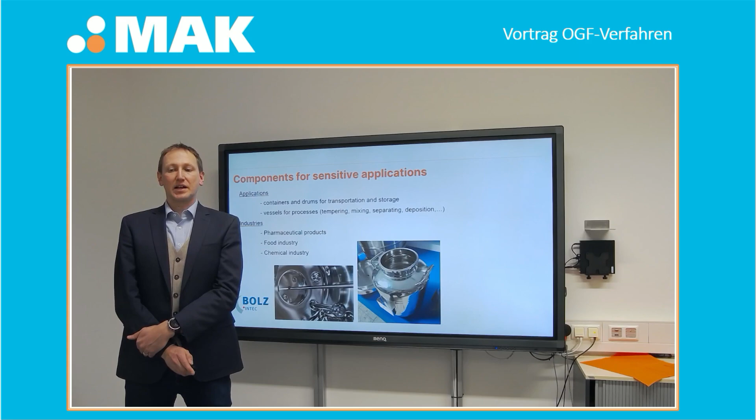The manufacturing of these components is normally carried out using high grades of stainless steel, for example V4A grades like 316L, but for some applications only lower grades like 304 are used. The standard regulations are given by different ISO standards. There are some regulations regarding surface quality and the look of these products, and to reach these high requirements, especially the hygienic requirements, there must be no surface defects. The surface roughness you have to reach is less than 0.8 micrometers, and the surface must be easy to clean and homogeneous. But unfortunately, there are no more specific requirements given by ISO standards, which is why there are mostly some additional customer requirements.

Well, talking about influencing factors: factors that influence the quality of the surface also influence the quality of the good inside our vessels. First, depending on the production process, the surface roughness, the surface topography, and of course the uniformity of the surface can be influenced. The chemical composition of the surface can be influenced as well, maybe by special chemical treatments to increase the stability of the passive layer. On the other hand, we have influencing factors from the product inside our vessel, for example the molecular structure or process parameters like temperature, humidity, flow velocity, and so on. All these factors together influence the interaction between our good and our stainless steel surface.

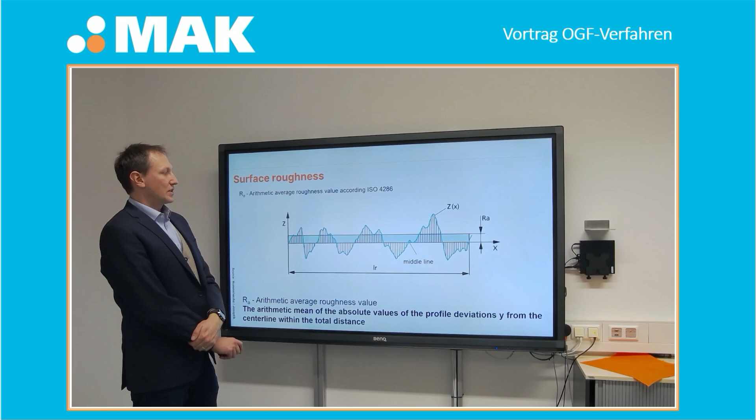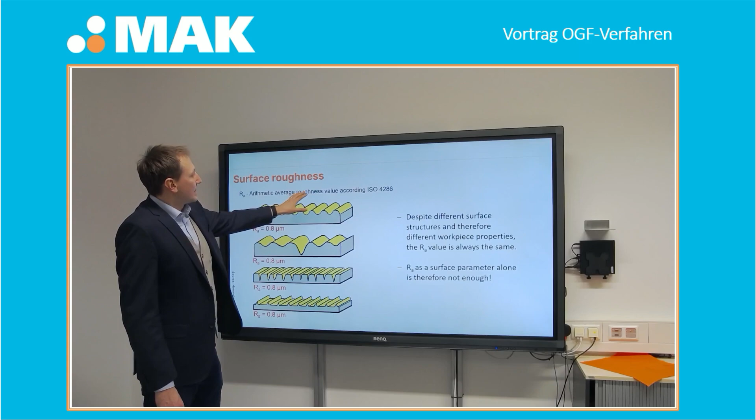And if we're talking about surface, we also have to talk about surface roughness. It's well known that we have different standards to characterize surface roughness, for example the ISO standard 4286 to characterize surface roughness by the Ra value. And it's also known by many people that a surface roughness like Ra 0.8 micrometers can lead to very different surface topographies. As shown here, you can have a very nice homogeneous structure, but you can also have a structure like this or like this. So even if we have a standard surface roughness smaller than 0.8 micrometers, we must be aware that you can have completely different surface conditions.

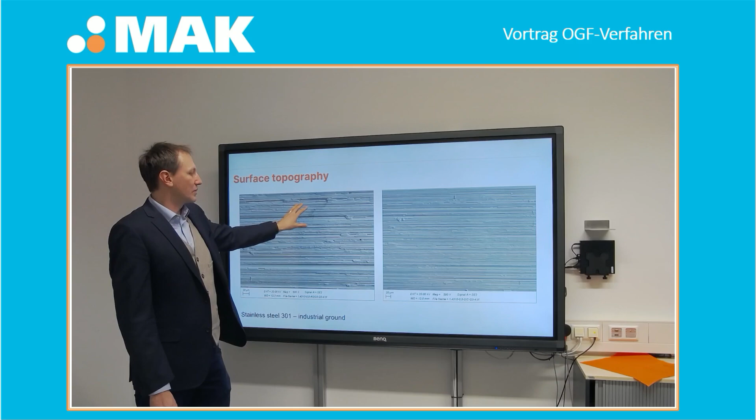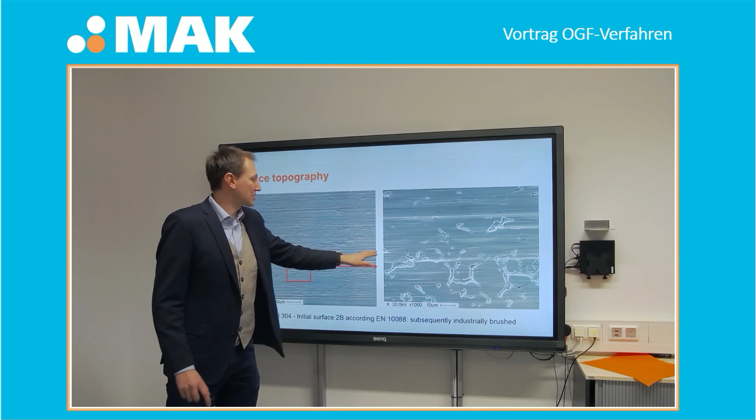If we take a closer look at a surface, maybe a ground surface, like shown here, an industrially ground 301 stainless steel, you can see we have different surface properties and different chips left on the surface, depending on the kind of surface preparation. The left side was done with an aluminum oxide grinding abrasive, the right side with silicon carbide. Even with the same grinding parameters, you get different kinds of surfaces. And if you add additional machining like brushing, you can also see, on closer look, microstructures left on the surface.

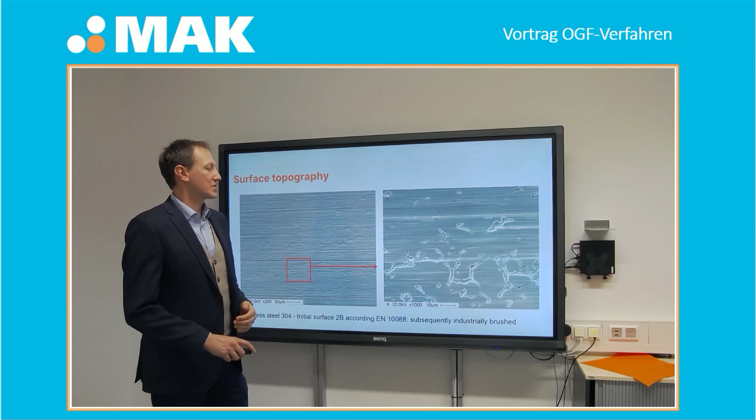You can see some grain boundaries from the chemical pre-treatment process, which was carried out before the brushing. These grain boundaries are very risky, for example if you are in contact with aggressive or corrosive goods, or if there are microorganisms in your goods, because they can stay in these microstructures and lead to contamination of your good.

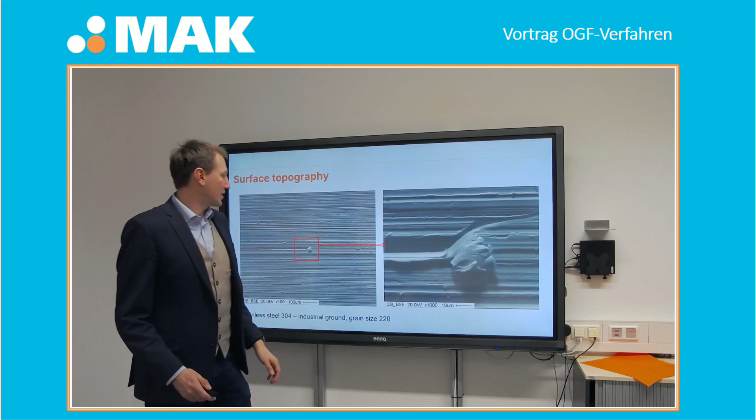And of course, grinding itself leads to metal chips. They can be left on the surface, along with microstructures like shown here, where you can have some deep scratches in the surface. These microstructures can reduce the corrosion resistance on one hand and lead to a higher rate of contamination of your good on the other hand.

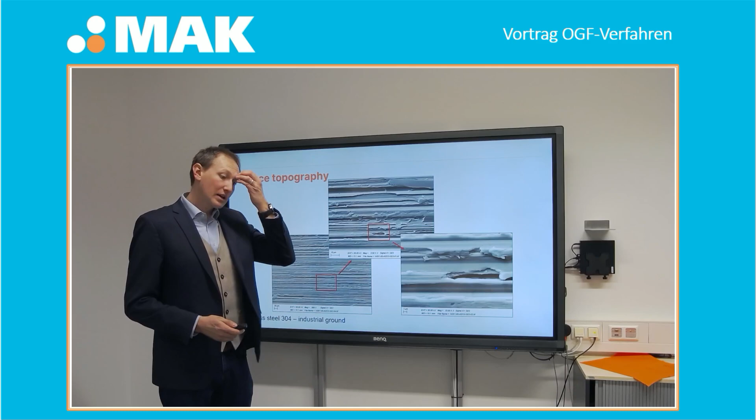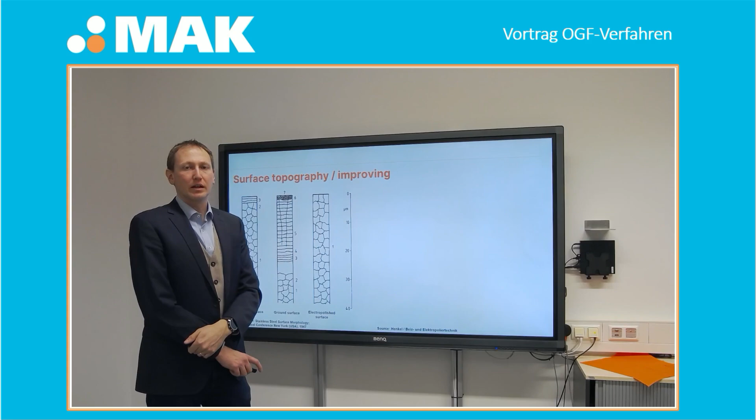Talking about machining, we always have to take into account that by machining a surface of a steel or a material, especially stainless steels, you have an interaction between a tool and your material. The material itself can be influenced by the mechanical machining, and the depth of this influencing factor is influenced by the way you do the machining.

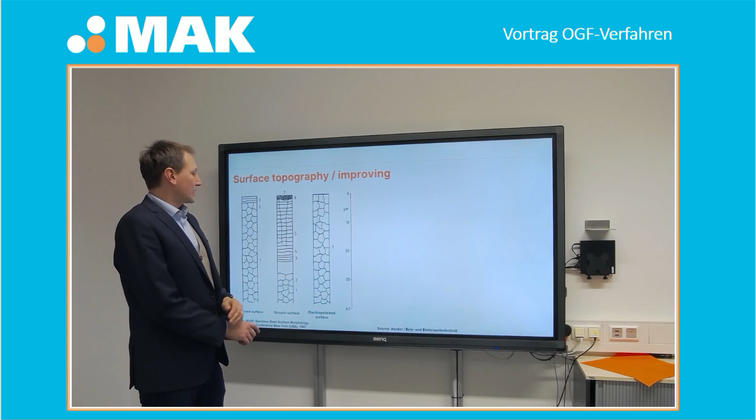Like shown in 1947 by Wolf, we have this so-called Beilby layer, and this Beilby layer can be influenced by different ways of machining. If we do a smooth machining, like honing, on a honed structure, we have only a very thin Beilby layer at the top. If you do a harsh machining, a harsh grinding, we're influencing this Beilby layer down to several micrometers, maybe 20, 30, 40 micrometers into depth.

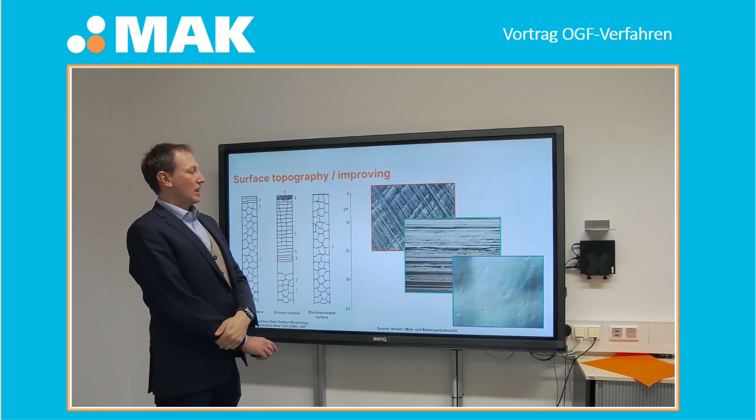And if we do electrochemical polishing afterwards, we are able to remove this Beilby layer, this deformed area, and so we have a very nice homogeneous metallic structure left without any deformation on the surface. But you have to take into account that the depth you can electropolish is limited. That means if you do a very harsh grinding on your surface, which is going to affect your material down to 40, 50, 60 micrometers, you may have some problems to remove all of this Beilby layer by the electropolishing process itself.

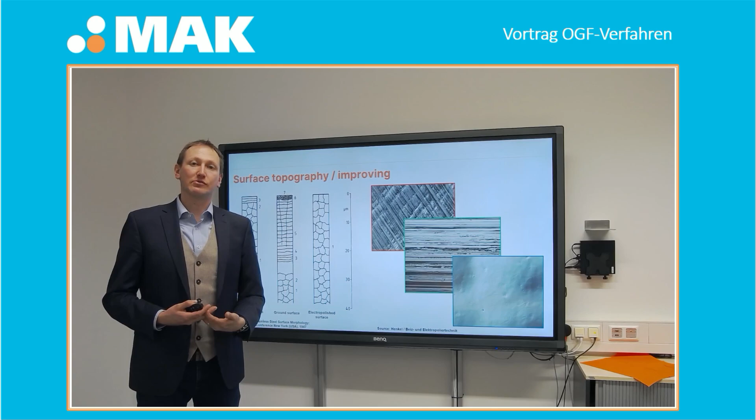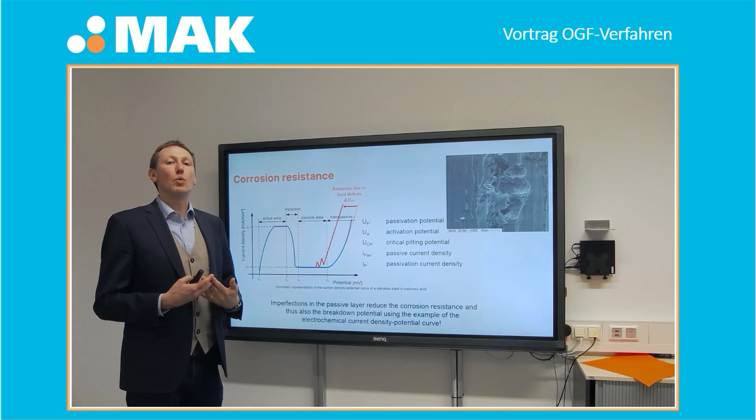And what's the goal of electropolishing? Of course, the goal is to get a homogeneous structure, a homogeneous surface, and also to increase the corrosion resistance, so to reduce the effect of local defects on the surface. Talking about corrosion resistance for stainless steel, we mostly talk about critical pitting temperature or critical pitting potential. In this case, we carried out some tests by the critical pitting potential according to the ASTM standard. Local defects decrease the critical pitting potential, meaning your surface is weaker against corrosion.

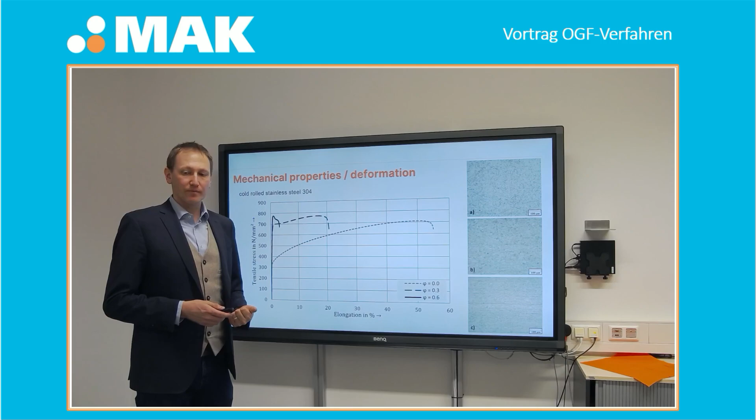But before telling you something about the corrosion resistance, I will illustrate the change of mechanical properties by processes like cold rolling. Like you can see here, we have a stainless steel 304, and by cold rolling you have an increase of the tensile strength of the material and a decrease of the elongation at fracture. This was carried out in combination with different kinds of surface preparations.

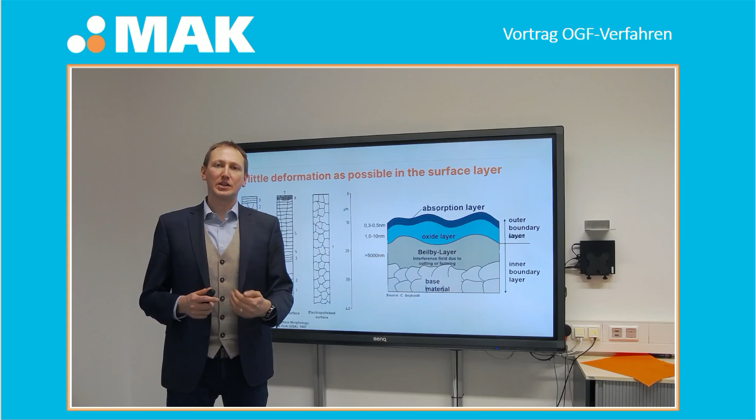So, coming back to the Beilby layer, it means we always have an interaction between our manufacturing process and the surface, and how the machining process is going to influence our surface conditions. And this was the starting point for the project we carried out in cooperation with our partners, where the idea was to improve our machining process of these stainless steel vessels, to increase cleanability, get better surface conditions and reduce risk of contamination of these very expensive goods.

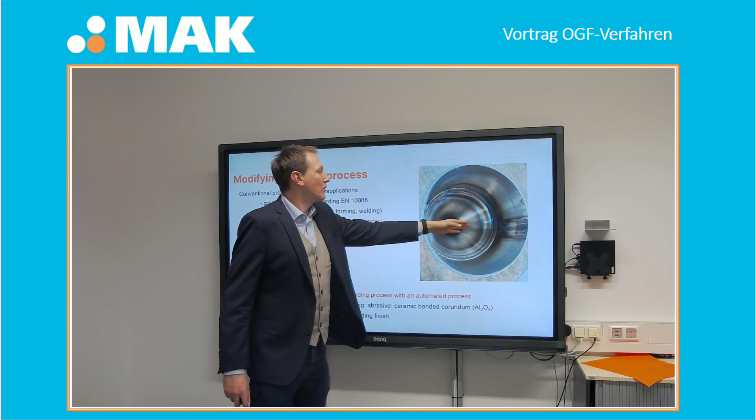If you're manufacturing a vessel like this, of course you have some rolling, some grinding afterwards, and welding as well, so you have to remove the areas around the welds, and this is normally done by manual processes. So you have pre-treated surfaces, you do the welding, the cutting, the grinding, then mostly a manual hand-guided grinding, for example by an angle grinder, and afterwards electropolishing. And the goal of our project was to replace especially the hand-guided machining, because this is very risky.

If the people that are carrying out this manufacturing process are not well trained, it's very risky that they are going to make some scratches, they're going to destroy the surfaces and even make a very deep deformation inside the material, which leads to a very huge problem, especially with the Beilby layer.

And so the goal was to replace this hand-guided machining process with an automated process, especially a vibration grinding process. And therefore we did a lot of different tests, and we realized that to get a very good quality of our surface, we have to do the grinding process with ceramic bonded corundum, aluminum oxide, and of course the process got a name. It was called optimized grinding finish. So this is the name given by BOLZ INTEC.

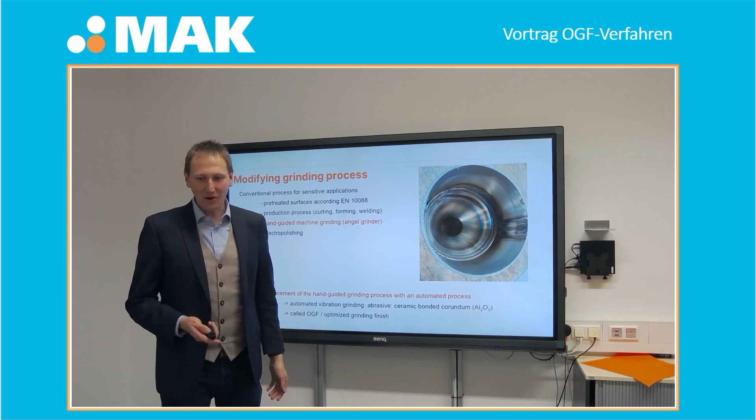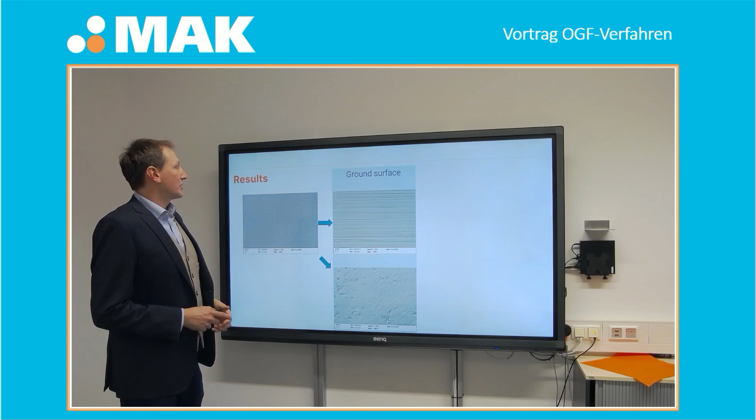Okay, and what does a surface look like? Well, starting with a standard surface of stainless steel you get from your steel supplier. If you do a normal grinding process, a ground surface like shown here, you have this linear structure from the grinding, and if you do this optimized grinding finish, you see that you have a homogeneous structure, no linear structures left on the surface. And if you do electropolishing afterwards, you can see, even after electropolishing, linear structures left on a standard ground surface.

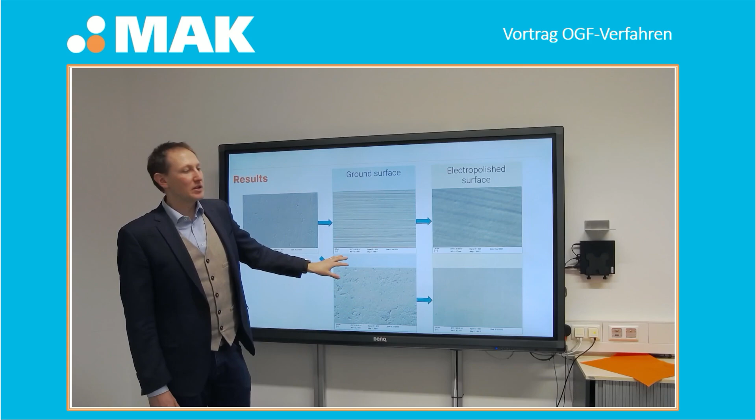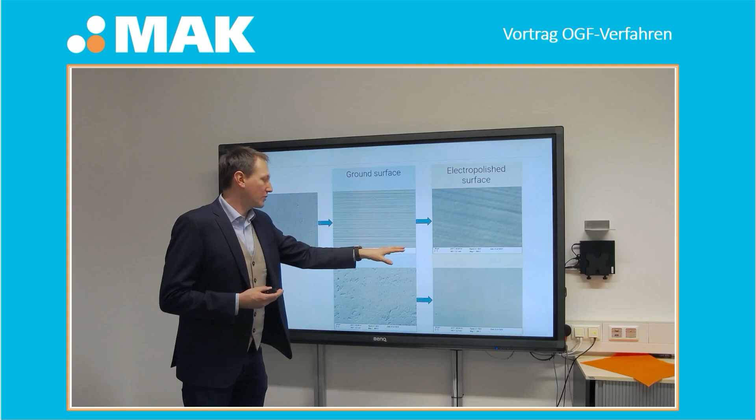So starting with a very rough grinding process with a grain size of 40 or 80 leads to very high Ra values. But increasing the different steps, we can reach maybe 0.4 to 0.5 micrometers, and afterwards, if you do the electropolishing, you reach maybe 0.2 micrometers surface roughness. If you do the OGF process, you can reach the roughness of grinding and electropolishing right after the OGF process, so you reach a surface roughness of about 0.3 micrometers or maybe 0.2 micrometers.

And if you do electropolishing afterwards, you're still able to reduce the surface roughness again. So you can reach 0.12 micrometers of surface roughness. That's about the roughness. And talking about the cleanability of the surface, you can see cleanability according to ISO 16232 in different machining states, if you do a conventional grinding or brushing and electropolishing afterwards. Here you can see the number of particles depending on the size of the particles.

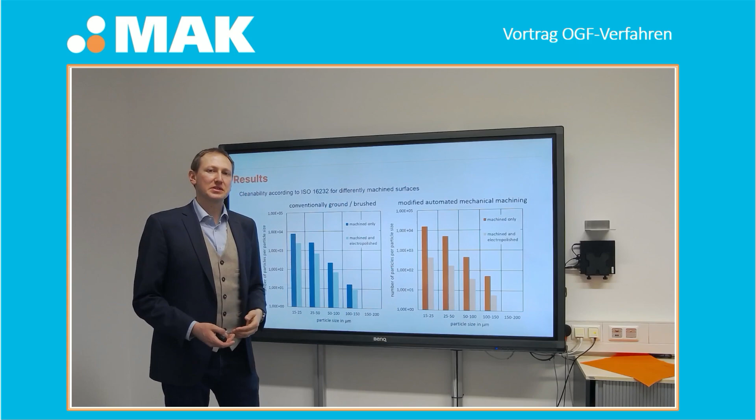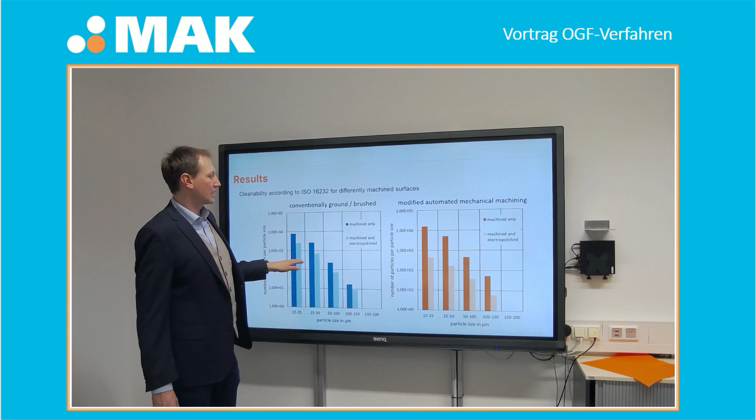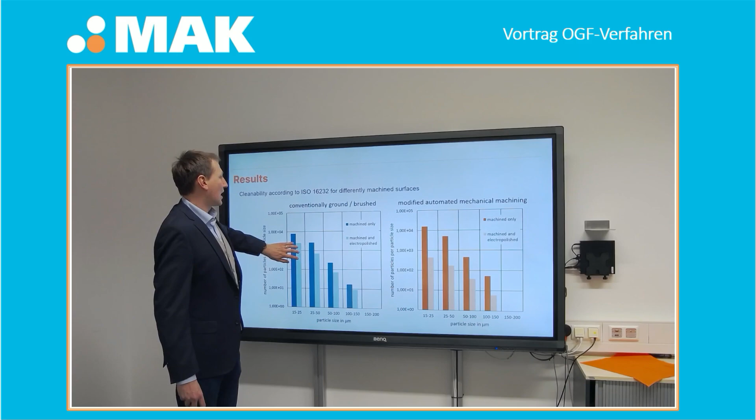If you do the OGF process, you can see that after OGF only, the number of particles left on the surface is reduced compared to only grinding. But if you do electropolishing on this surface afterwards, you can see a very strong decrease in the particles left on the surface, and especially if you compare the number of particles left after OGF compared to after conventional grinding and electropolishing, you can see that there is an increase of cleanability by the OGF process in combination with electropolishing.

So, to come to a conclusion, it's possible to have a reduction of the mechanical influence in depth by the OGF process. This leads to a more homogeneous surface after the grinding. We have fewer imperfections left on the surface, and we have an improvement of the surface properties, especially regarding the cleanability behavior after electropolishing.

This whole post-processing, like electropolishing, always improves the surface properties. And of course, electropolishing is able to remove imperfections, but if you have imperfections on the surface from the machining process, you are unable to remove every kind of imperfection, and you are unable to remove every kind of dislocation inside the surface only by electropolishing.

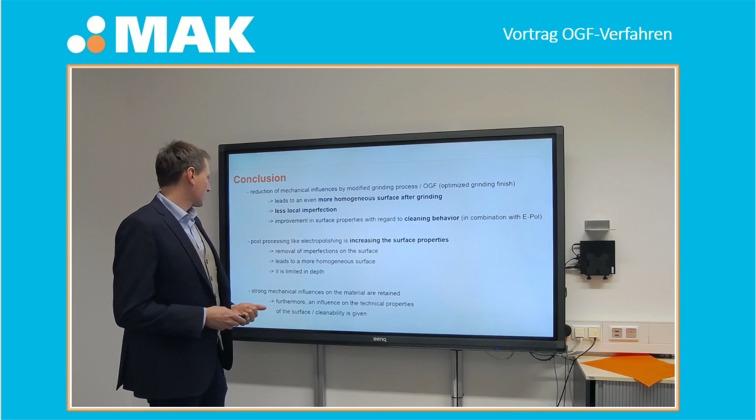So it's very important that you take into account that you have this Beilby layer, and every kind of machining process you do is influencing this surface and the Beilby layer itself. If you reduce the depth to which this Beilby layer is influenced by your machining, so if you don't do a very harsh machining but a very slight machining and reach a good surface condition, you have better surface conditions, you reach a better cleanability, and especially post-treatments like electropolishing lead to a better quality of your surface.